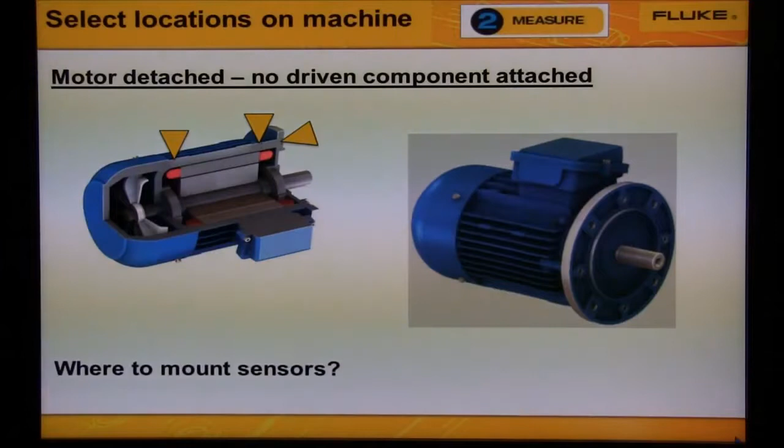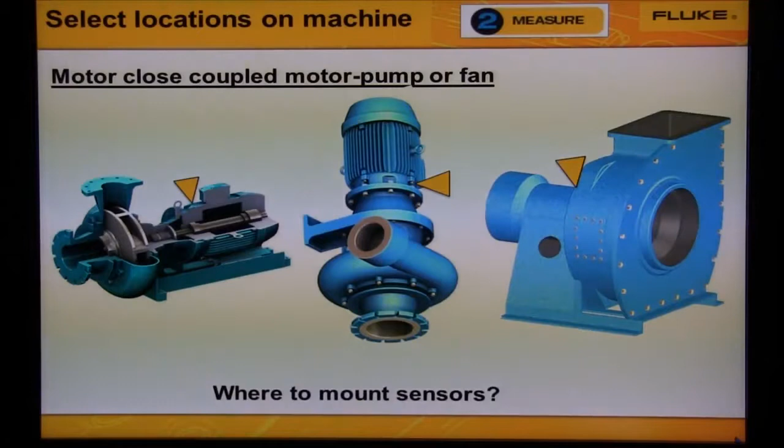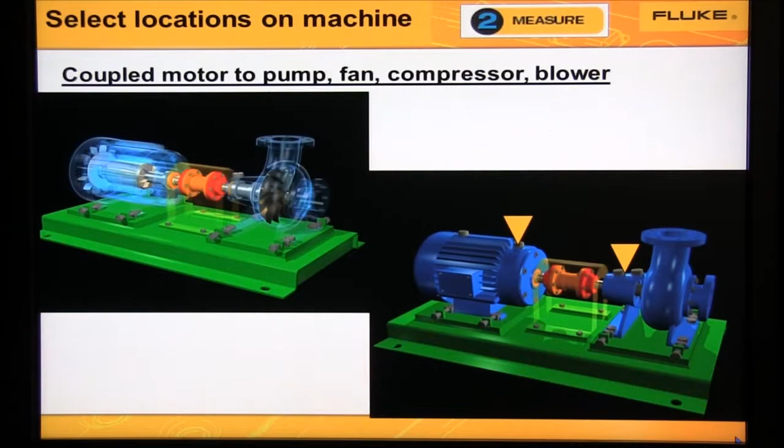So if the motor pump is small, we'd collect data from one motor bearing and from one pump bearing, as we see in this diagram. If the motor pump was large, we would collect data from all 4 bearings.

This slide shows where to mount the sensor on the bearings to measure the motor and the pump. The machine on the left, 1 or 2 locations on the motor, and both of the pump locations can be measured with the one location.

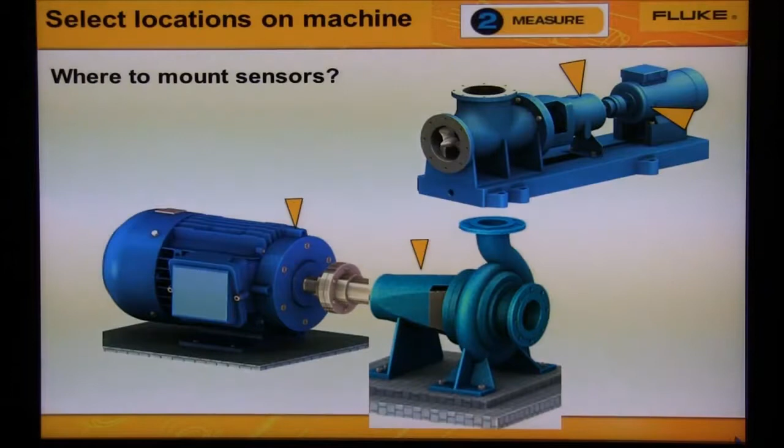Notice the arrow in the picture. The machine on the right is also small. 1 location on the motor and 1 location on the pump is all we need.

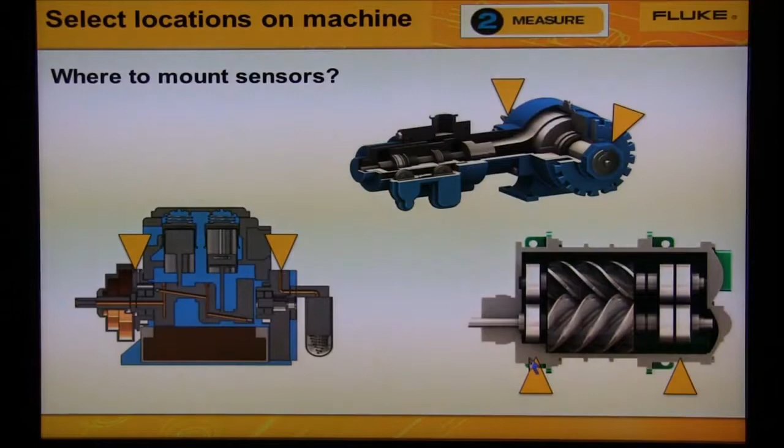There are 3 types of compressors: centrifugal, screw, and reciprocating piston. On the 2 piston compressors, we would mount the sensor on both ends of the compressor shaft. On the screw compressor, down at the bottom right, we'd mount the sensor on each bearing location, again, on each end of the shaft.

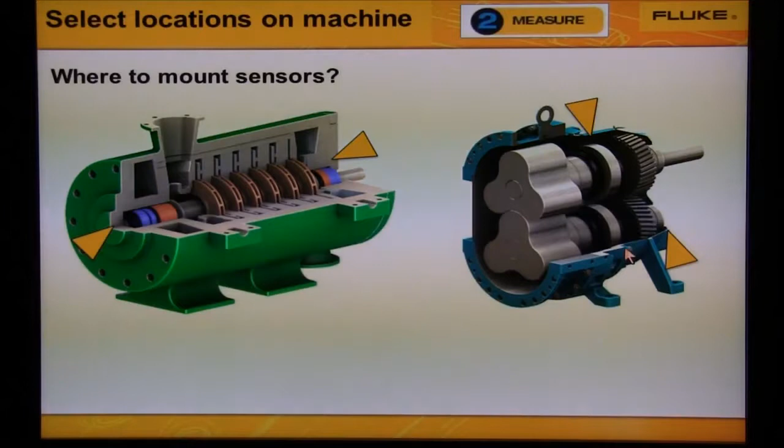Blowers are either centrifugal type or lobe type. The Hoffman blower, we would measure from the bearings on both ends of the compressor or blower, and the lobe type blower, we would measure from the bearings on both ends of the blower.